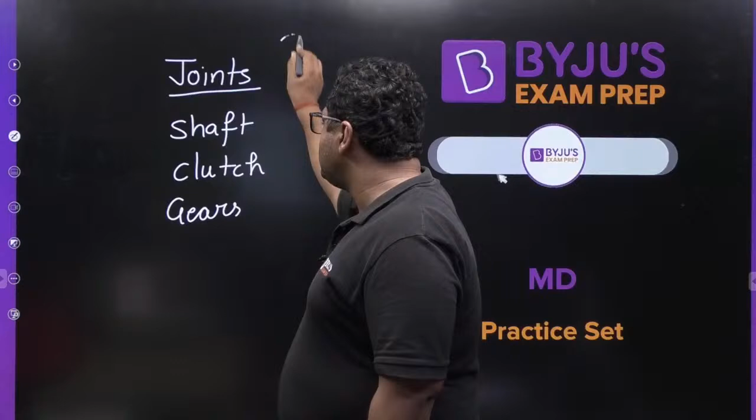Today we will see the rest topic of machine design so that we can cover all the topics. Yesterday we saw fatigue loading, questions related to brakes and bearings, and today we are going to cover joints. There are three types of joints: bolted, riveted and welded. Then we are going to cover shafts, clutches, and after clutches, gears as well. So these are the topics from which questions are there in today's session.

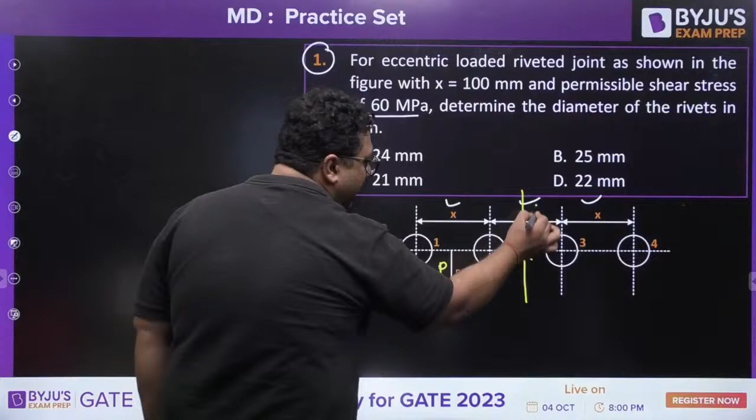This is a 50 kilonewton load. First of all, you will see the equivalent effect of this load at CG or centroid. To see the equivalent effect at the CG or centroid of the rivets, you will apply the same load in the downward and upward direction. So if this is load P, you will apply P downward, P upward. Then this P and this P will make a couple.

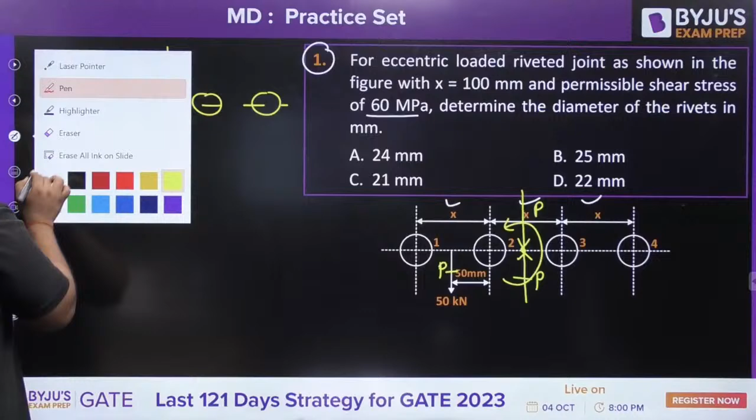So they will be making a couple, and you can see the couple is coming like this. Now I can make this diagram freshly, that we are having 4 rivets like this. This is the line of them, and this is going to be the centroid. At the centroid we have one force of 50 kilonewton, and we have one couple, and for this couple, what is the distance between these two? Obviously 100. So you will write it is nothing but 50 kilonewton into 100 mm.

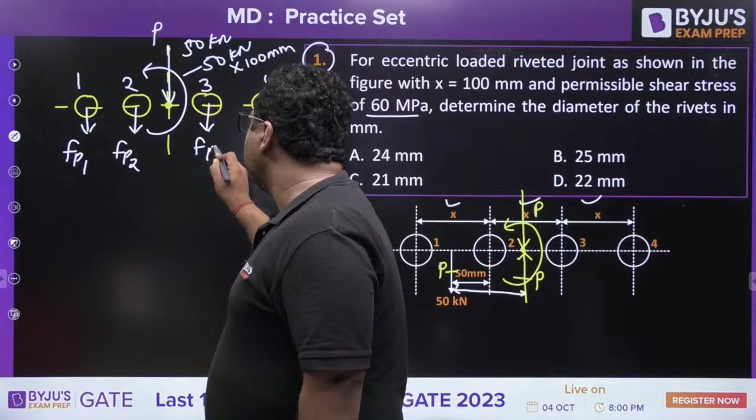Okay guys, so now you need to see the primary effect of force and secondary effect of couple. Because of this force, this is said to be the force which is acting, P. For all the rivets, this force will be equally distributed, and that is said to be the primary effect. So this is rivet number 1, rivet number 2, rivet number 3 and rivet number 4. We will call it primary force 1, primary force 2, primary force 3 and primary force 4.

Okay, my dear, yes Midun, good evening. Late ho gaye, solve this question dear.

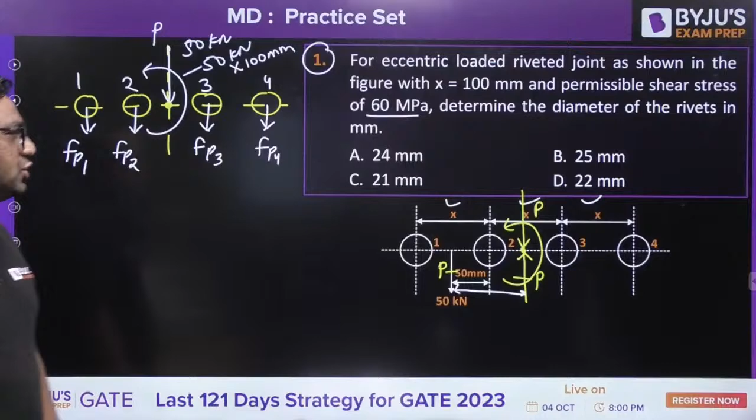And guys, do like and share the session so that other students can also reach here. I know machine design is one of the low weightage subjects, but guys, 4 to 6 marks are very much, I can say, very effective. They can affect too much if you are leaving it improperly. So try to do at least the type which every year comes.

Yes, so guys, what you will be doing? You will be saying this is going to be P by 4.

Okay, so 50 kilonewton will be divided into that. Now you will see the effect of this couple. For this couple, you know that if you see all these 4 rivets, the first one is going to be farthest, so secondary effect will be coming in this direction on rivet 1, in this direction on rivet 2, in this direction on rivet 3, in this direction on rivet 4.

You also know that secondary force Fs1 will be written as P into e into R1 divided by R1 square plus R2 square plus R3 square plus R4 square. So as you know, the first rivet is the critical loaded rivet. Why? Because it is going to be at R1 distance, and it is nearest to the load. The rivet which is nearest to the load is the critically loaded rivet.

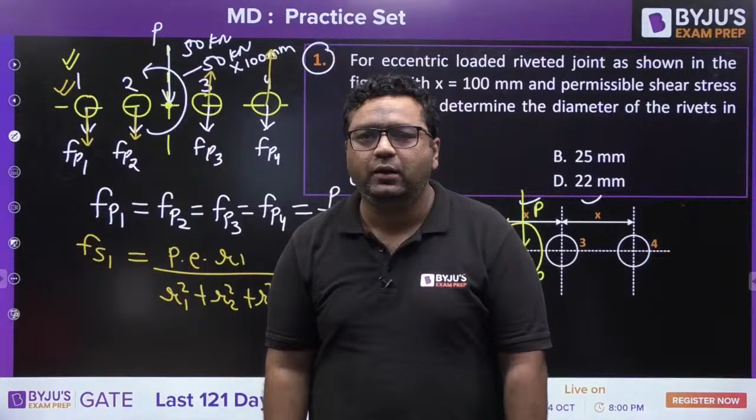So solve this question, guys. This is P into e into R1, divided by R1 square, R2 square, R3 square, R4 square. Put these values and get the secondary forces.

Now you can see both primary and secondary are acting in the same direction, so resultant will be nothing but primary plus secondary. Resultant force divided by pi by 4 d square, this is going to be the tau maximum stress. In the question, you need to find the diameter of the rivet when the stress is mentioned as 60 MPa. Try to solve it.

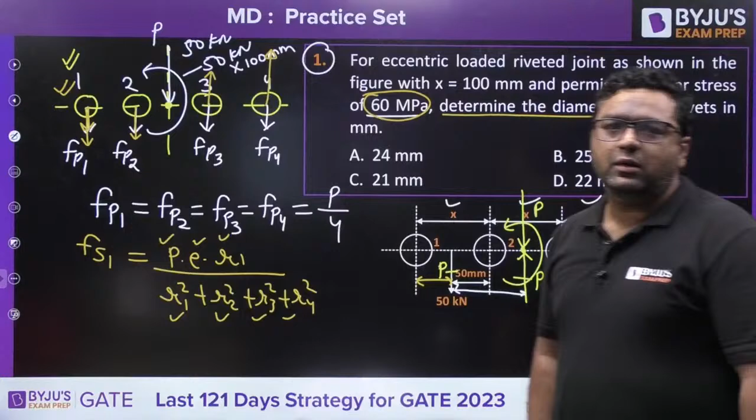What is the answer coming out to be? What would be the answer for this question, guys? Please tell me.

Tell me, I have solved it in front of you. Just calculations are left.

Yes guys, solve it, solve it.

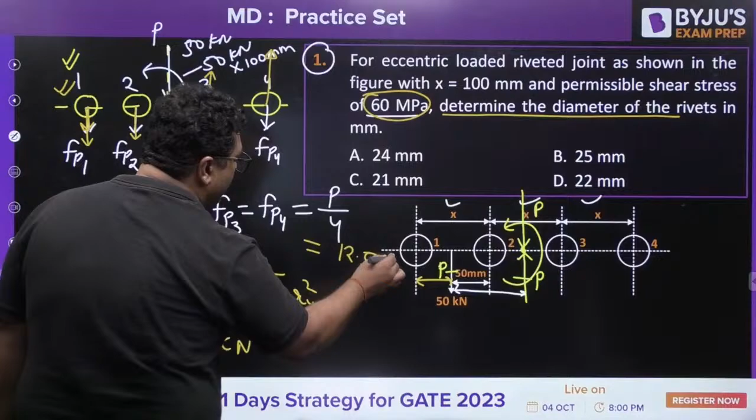So when you will be solving it, guys, the secondary force will be coming out to be equal to 15 kilonewton, and primary force is P by 4, it is going to be 50 by 4, which is 12.5 kilonewton. So when you will be putting this value, tau permissible is already given to you. Putting this value, resultant is known to you. You will be getting the diameter of rivet to be coming equal to what?

Tell me, what will be the answer?

Yes, you just need to do this one. Resultant will be, you can see FP1 is 12.5 plus 15, that is 27.5. So 27.5 into 10 to the power 3 divided by tau max which is 60 MPa, is equal to pi by 4 d square. Tell me the value of d.

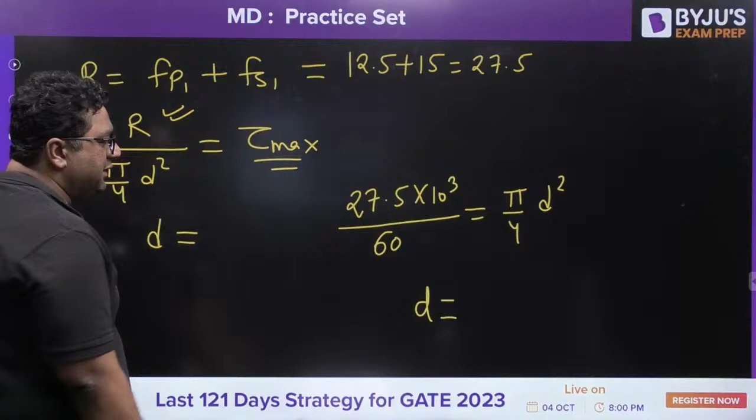Just you need to find out the value of diameter. All the things we have already put it, we have already kept. What would be the answer? Please tell me that.

Nagaraju is saying 27.72. Sorry dear, I feel you have done some mistake in calculation because that is not in the option.

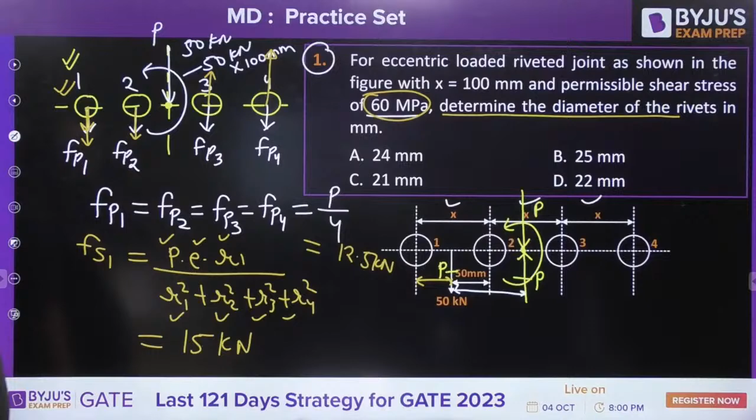Yes, anybody else? 21, 22, 24 or 25?

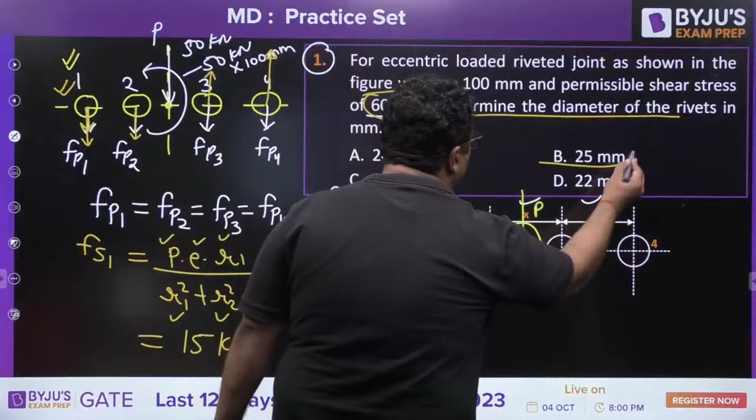I have given you the value of primary and secondary forces. The first rivet is the worst rivet. Mithun has given the right answer, 24.15. So the answer will be B, 25 mm. Very good guys, so this is the first question.

Now we are coming to the second question. This is a relatively easy question. Very good, Naveen, very well done.

Now moving to this question, guys. In a riveted joint, the diameter of rivet hole is 20 mm. Pitch is 3.5 times the diameter. They are asking you the efficiency. You know efficiency is given as, what is the formula for efficiency? It is P minus D by P, this is the formula for efficiency.

So guys, just apply the formula and get the answer. This type of question has already been asked in GATE 2004, that's why I have taken this. So this type of question has appeared 2 times in the exam. Solve it and give me the answer.

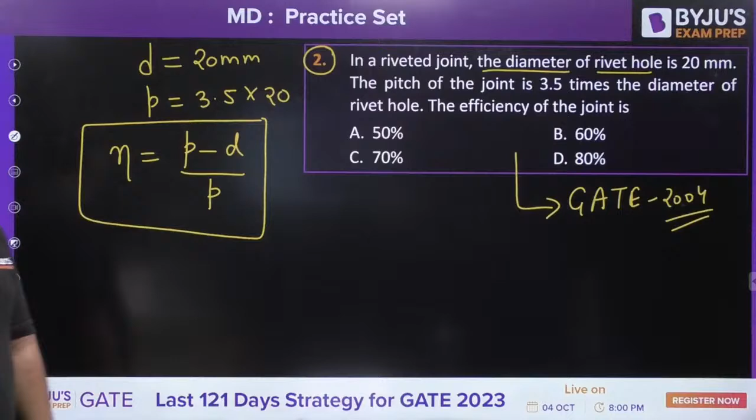Mithun is saying C, very good. Tomato, Pudina, where are you, tell me. Nagaraju, Naveen, the formula is in front of you, I have given you the formula. You just need to put the value, nothing else. Very good, Nagaraju, Mithun, very well done, excellent.

So guys, when you will be putting the value, the pitch is 3.5 into 20, minus 20, divided by 3.5 into 20.

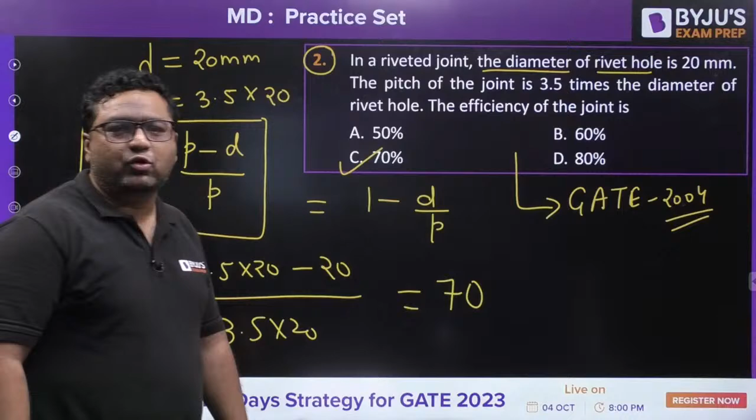You can also solve it as 1 minus D by P, and you will get the answer to be 70%. C is going to be the right answer. Yes, Krishna Murthy, very good, your answer is correct.

Let us move to the third one. This is also on the same formula. This time they are asking the pitch, and they have given you the efficiency, which is 1 minus D by P. Solve it and find out the pitch, guys. This is question number 3, do this and we will move on to the next question.

So guys, we are covering joints, gears, shafts and clutches. These 4 topics are covered today. With this, the machine design part will be over, and then I will take material science on Saturday for the same GATE Champion series.

Pudina is saying 100, very good. Naveen is saying 100, Tomato is saying 100, Nagaraju is saying 100, very nicely done. Mithun has also already answered. Yes, the answer is going to be 100 mm, guys, no doubt about that. Very good, Krishna Murthy.

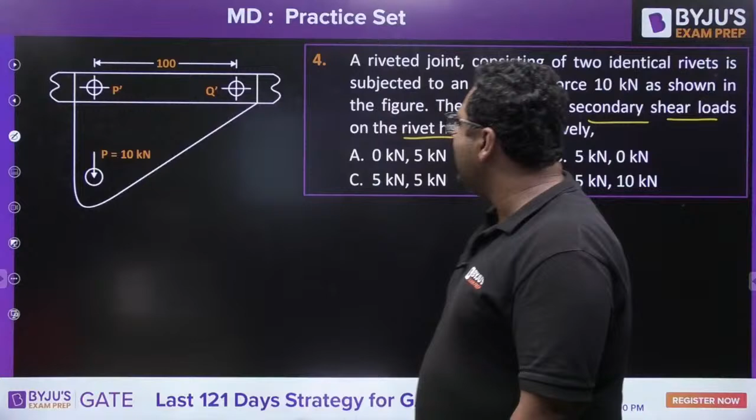Moving to the next question, guys. This is from eccentric loading, and this time they are asking about the primary and secondary shear forces on the rivet hole, with the force acting like this. Two identical rivets are subjected to an eccentric force of 10 kilonewton; find the primary and secondary shear loads on the rivet hole respectively.

So guys, just solve it and give the answer. Solve it and give the answer.

First of all, you will see the centroid. After looking at the centroid, you apply one force downward, one force upward. These two will make a couple. On both the rivets individually, the primary force will come in the same direction - this is primary 1, this is primary 2. When we talk about secondary, as the couple is acting like this, secondary here will come in the downward direction, FS1, and here in the upward direction, FS2.

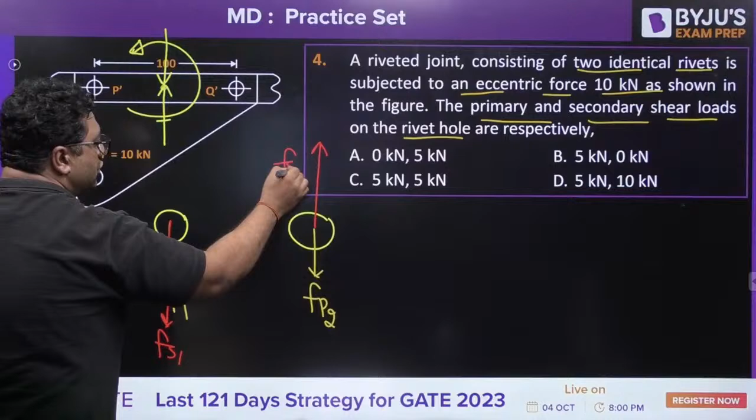You just need to calculate the values because this is at the R distance, and this is also at the R distance. So FS1 equals FS2, and the formula is P into E into R divided by R1 square plus R2 square. Primary forces are easy to calculate - FP1, FP2 are nothing but the net force P divided by 2. This is how you find secondary and primary forces, my dear.

Mithun has answered it as D. What about others? I am waiting for others' answers. Mithun, you can check it again if you want. Yes Krishnamurthy, what is your answer? Naveen, what is your answer? Nagaraju, Pudina, Tomato, what are your answers?

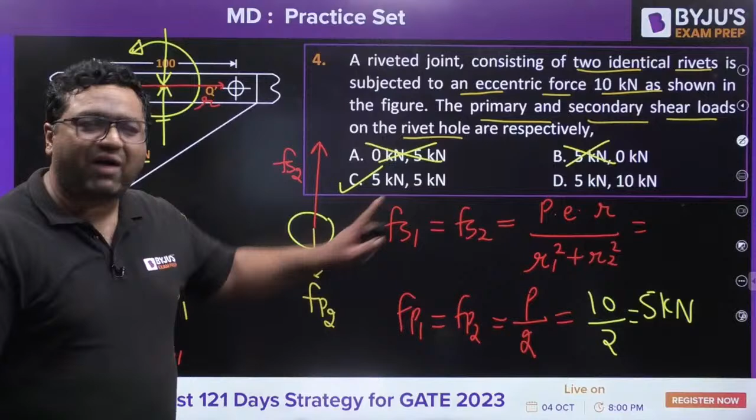If you see, total load is 10 kilonewton, so this 10 will be divided, giving 10 by 2. So no doubt, 5 kilonewton will be the primary one. If 5 kilonewton is primary, A cannot be the right answer - either B, C or D will be right. You can see secondary does not come out to be 0, so B is also wrong. Now we need to see if secondary is 5 or 10, so calculate it. Total distance is 100, so this distance will be 50. So P is 10 into 50, the distance is again 50, divided by 50 square plus 50 square. It comes out to be 5 kilonewton. So the answer is C for this.

Very good, so guys let us move further. Now question number 5 and 6 are on this figure. You can see this is once again eccentric loading.

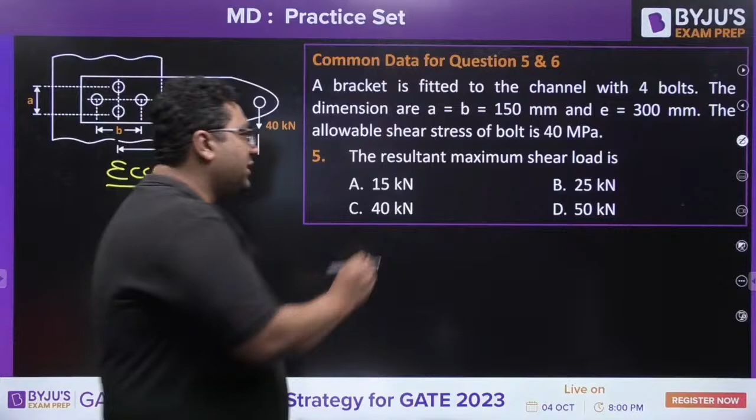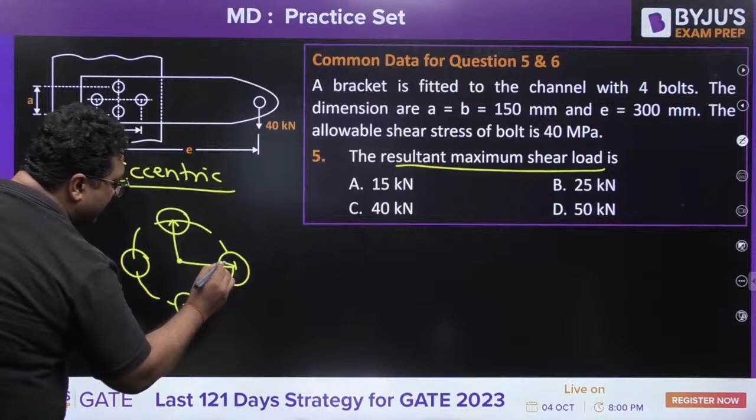Once again eccentric loading. This time you need to find out the resultant maximum shear load. If you see all the rivets, they are present on the periphery of a circle. So if this is the CG or centroid, you can see all the rivets are at the same distance. So secondary force will be coming equal for all.

You need to find out the resultant maximum shear load and see the critically loaded rivet. All rivets are near the centroid, so if you see load wise, they will be same, but you need to see where primary and secondary are directly added. So first we will see the effect on the centroid, and then we will move further.

Try to solve it, guys. This time I will wait for you to answer, because we have done this type of question a lot. Still, if you want, I can give you a favor. These are 4 rivets, with CG or centroid, and you will put one force down, one force up.

So down force and up force, this is 40, this is also 40. Now this 40, this 40, this 40 and this 40 will make a couple. So overall, what you will be getting, I am showing you: at the centroid, a 40 kilonewton load and a couple like this.

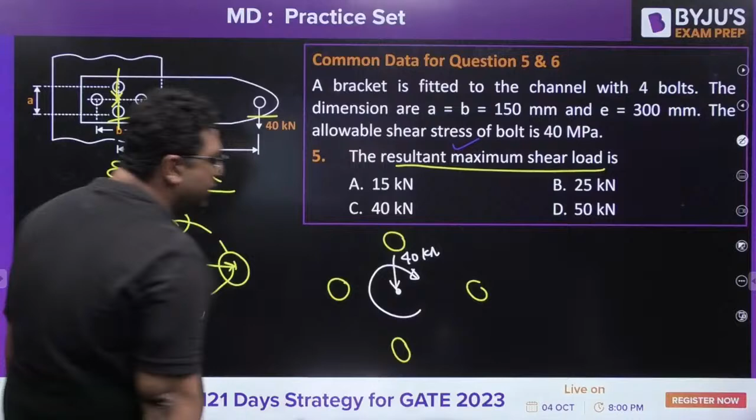And this couple is nothing but P into E. So we have one force and one couple P into E. Now you will see the primary and secondary effect. For this 40 kilonewton, on all the rivets we will be having a primary effect like this, like this, like this, like this. And on all the rivets, when you see secondary effect, it will be like this, like this, like this, and like this.

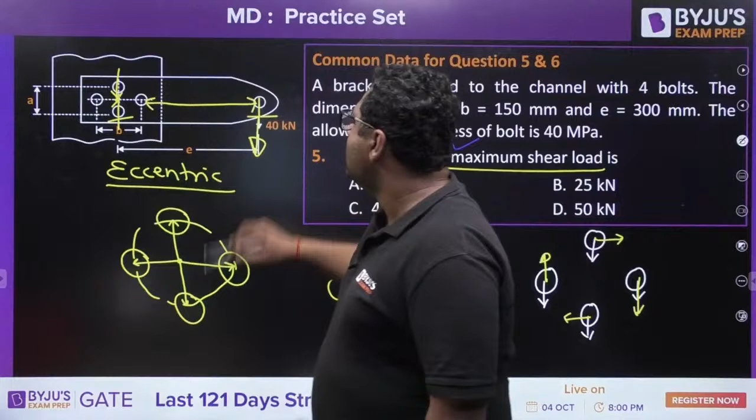You can see from this applied load, this rivet is the closest one, so this is going to be the critically loaded rivet. This rivet is going to be very important for us.

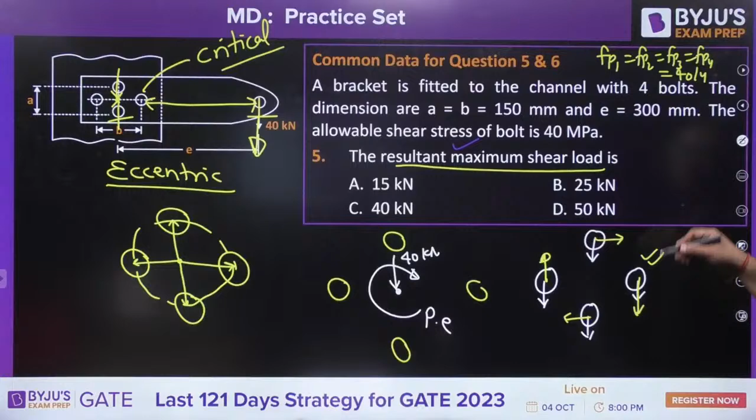So primary force in all the rivets are going to be equal: FP1, FP2, FP3 and FP4. It will be coming out to be once again 40 by 4. So primary force is 10 kilonewton. I will write primary by white color, 10 kilonewton.

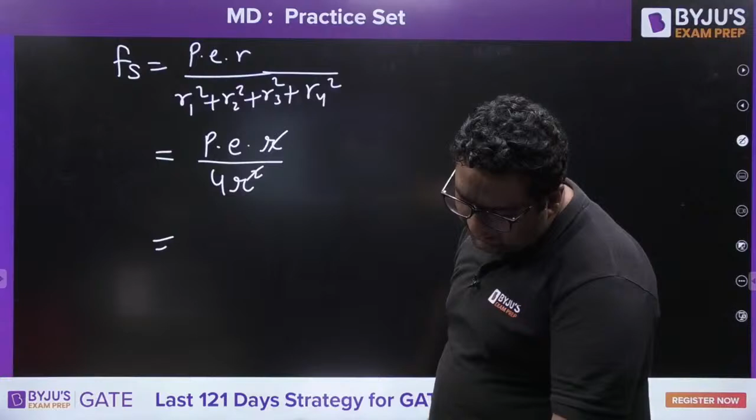For secondary you need to apply the formula that secondary force equals P into E into R divided by R1 square plus R2 square plus R3 square plus R4 square. All the R's are equal, so you can write it as P into E into R by 4R square. R and R will get cancelled out. You will put the value and get the secondary force, which comes out to be 40 kilonewton.

Then you will find out the resultant. If you see the formula, both are acting in the same direction, so you can directly add and get the answer. FP plus FS: 10 plus 40, answer will be 50 kilonewton.

So those who have given D, that is the correct answer. Very good, very good, very good.

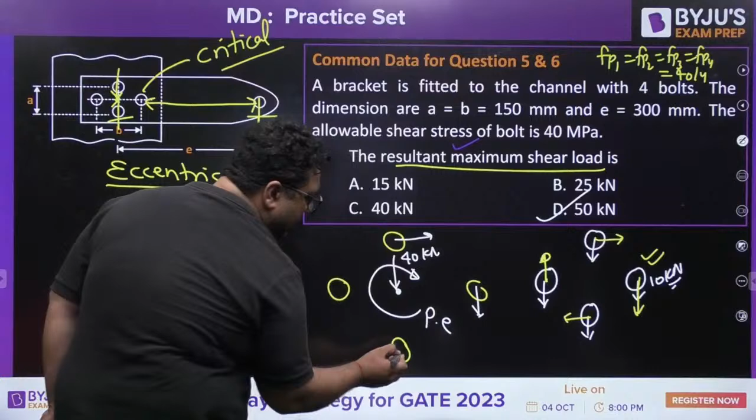I have explained the direction of secondary forces. If you see, this is the couple going, so this couple will apply here like this, here like this, here like this, here like this. If you want to see the direction, just do one thing, I am telling you, on the next slide.

If the couple is acting like this, you just make the radius in the direction of the couple, perpendicular. Radius in the direction of couple, perpendicular, for each rivet. This is how we can check the direction of the secondary force. Is it clear, guys? So the answer will be coming out to be D for this.

And with the same data, you need to find out the nominal diameter of the bolt. So here the same data is there, you just need to use R by pi by 4 D square equals tau permissible, which is given to you as 40 MPa. Put the value and get the value of diameter. With this, the sixth question will be over.

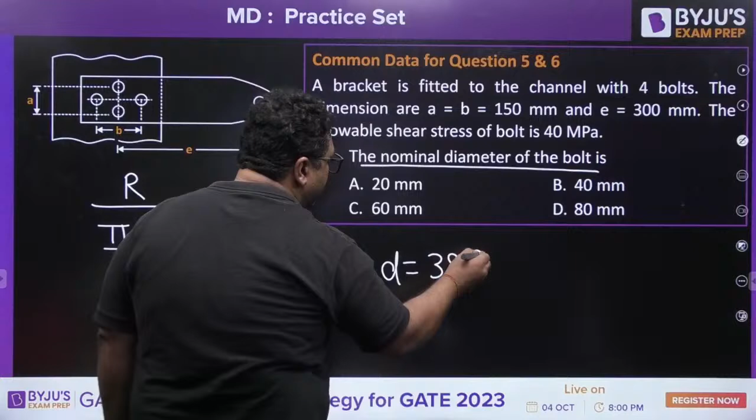Pudina, Tomato, and Midun have given the answer as 40 mm. Let me check it... yes. Guys, the answer comes out to be 39.9 mm, which is near to 40 mm. So this will be the final answer.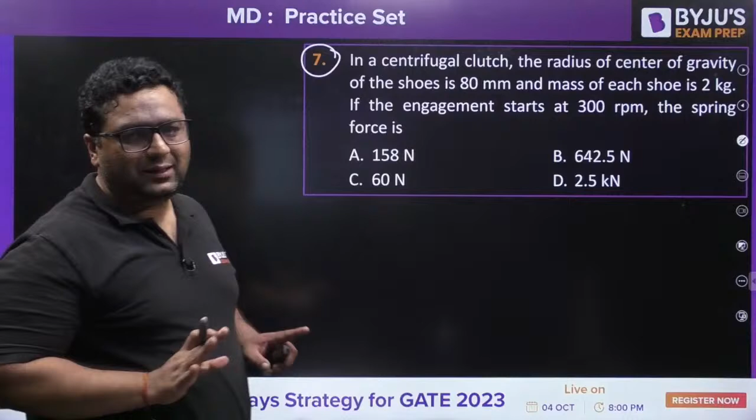Moving to question number 7. Now the question is from clutches. We have already done the joint questions, and now we move on to the clutch questions.

Yes, solve it guys. R is the resultant force. In the previous question, we have found out R to be 50 kilonewton.

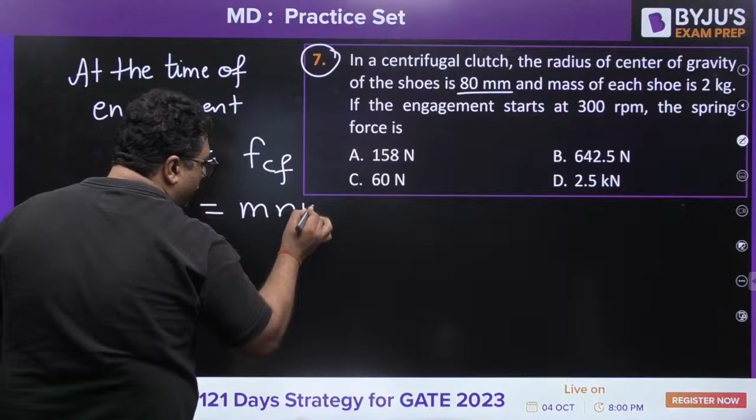The spring force Kx becomes equal to the centrifugal force, which is nothing but m r omega1 squared. So my dear, you just need to equate these two things and you will get the answer.

Kx is equal to m r omega squared. So my dear, just find out the answer.

This is a centrifugal clutch. Midun is saying A will be the answer. What about others? Mani, solve it. Nagaraju, solve it. Tomato, Pudina, tell me what will be the answer.

Krishna Murthy, where are you? Solve it and get the answer. Then we will move to the next question. Okay, yes, solve it guys.

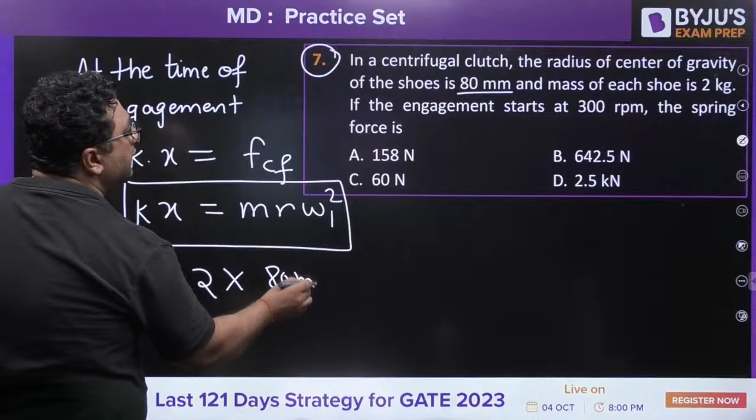Mass is given to you as 2 kg, R is given to you as 80 mm, and Omega is 2 pi n by 60, squared. Solve it and get the answer.

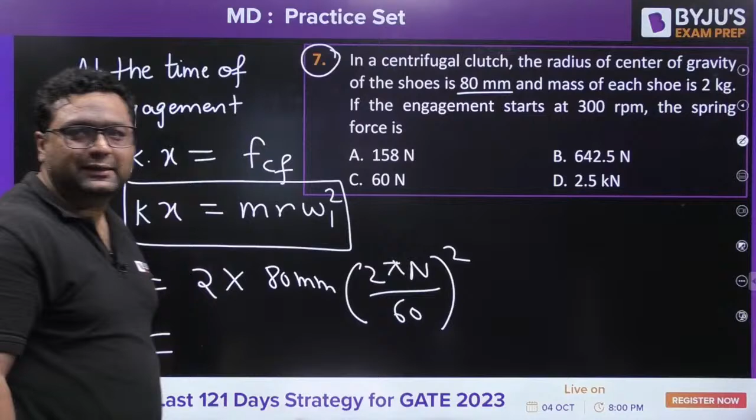Okay, Mani is also saying A, and yes guys, the answer is A. The answer will be coming out to be...

158 Newton. 158 Newton is the right answer. Okay, very good, Mani.

Moving to the next question. This is from a multi-plate clutch. So they are saying that a multi-plate clutch transmits 50 kilowatt of power, and at 1400 RPM, they have also mentioned the RPM.

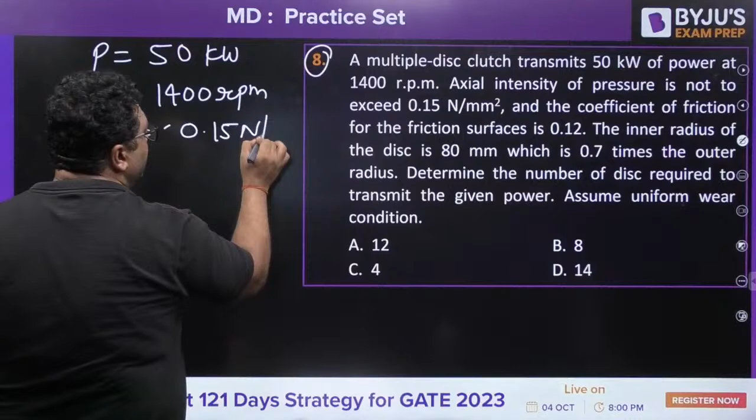And they are also giving you the pressure, 0.15 Newton per mm square. Coefficient of friction is 0.12. Inner radius of the disc is 80 mm.

And the outer radius — the inner radius of the disc is 80 mm, which is 0.7 times the outer radius. So this is 0.7 times outer, meaning 80 by 0.7, and you will get the outer radius.

So they are asking you the number of discs required. For that, you need to assume uniform wear condition.

Very good, Krishna Murthy, it's great.

So guys, first of all for this question, you need to find out the torque. Power is T into omega, so you will be getting torque from this.

Once you get torque from this, you can write N, the number of discs, using the uniform wear theory: 1 by 2 mu W into R naught minus Ri. Is it clear? R naught plus Ri.

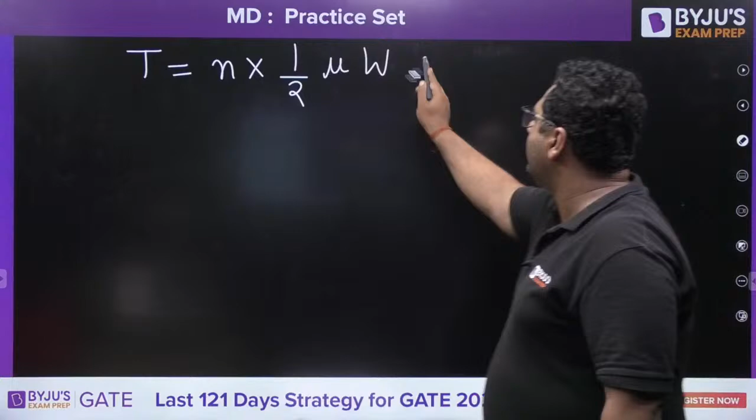So when you see this, you will be applying the uniform wear theory. After that, you know what you need to do — you will be putting the value of pressure. I am writing it in terms of pressure directly, and that will help you, so first find out the torque.

Torque is power by omega, so first find out this torque. Then you know the torque of uniform wear theory — how it is given. Yes, what is the torque of uniform wear theory? Do you remember — 1 by 2 or 2 by 3?

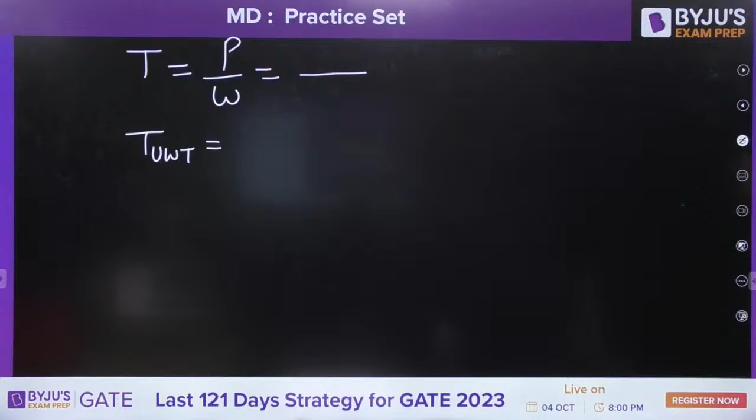Yes, 1 by 2 or 2 by 3. Okay, T is 341.04 — let me check. Yes, it is correct. 341.04 Newton meter is correct.

Mani is saying 1 by 2. Okay, it will be 1 by 2 mu W. What comes after that? 2 by 3 is UPT — 2 by 3 is UPT.

2 by 3 mu W, R naught cube minus Ri cube, divided by R naught square minus Ri square — this is the result for UPT.

Okay, here it is UWT, so you will be having 1 by 2 mu W R mean, yes, and N is the number of discs. So my dear, you just equate it with...

341.04. And my dear, the load according to UWT can be written as pressure into 2 pi R into R naught minus Ri.

And my dear, if it is mentioned that pressure is maximum, the radius will be minimum, so it becomes P into 2 pi Ri into R naught minus Ri. Okay, so this is what you are going to do.

Okay, and then you will be putting in the values and you will get the answer. Solve it.

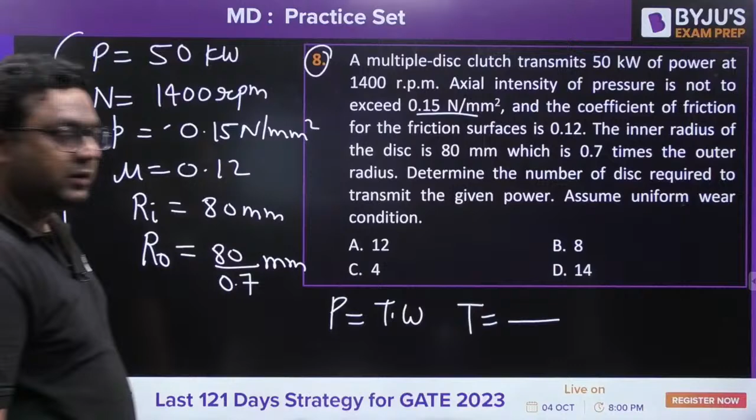11.3176. Very good, very good. Tomato, Pudina, your answer is correct.

11.31 you are getting, but the option you have chosen is wrong. Krishna Murthy has also answered. So you will be getting N to be 11.346, so the answer will be 12.

Yes, Tomato Singh, Pudina, Midun, Krishna, very wonderful. The answer is going to be A for this.

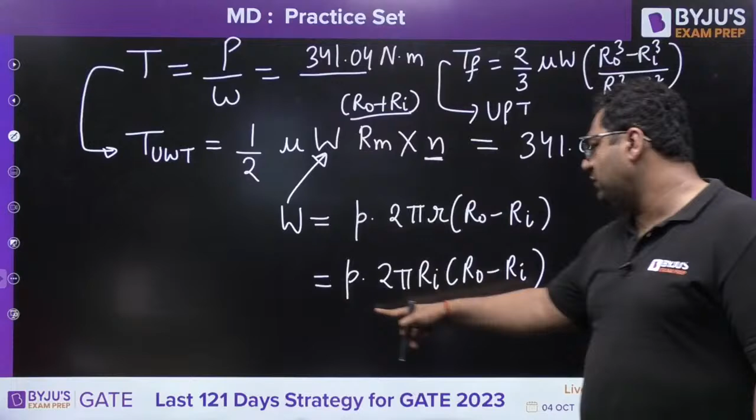Yes, Nagaraju and Mani, understood what you need to do. This is R naught plus Ri, you just need to find out N. The value of W is in front of you. Only calculations and calculation. In machine design, without calculation you cannot think. Calculations are very, very important for this subject.

Yes guys, let us move further now. The answer will be coming out to be 11.346, so 12 you will tick. Wonderful, moving further.

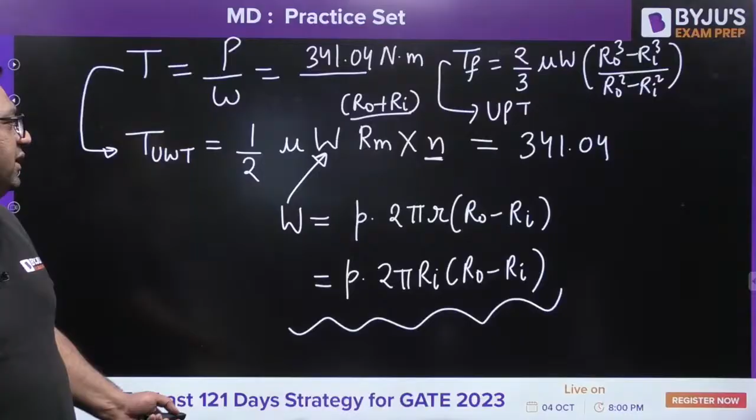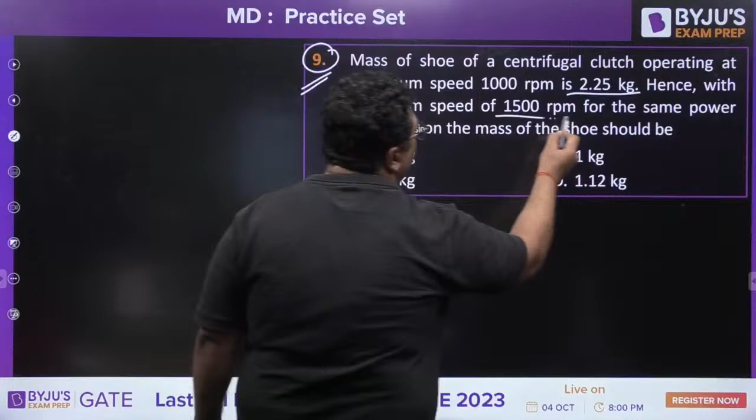Now question number 9, once again from centrifugal clutch. This time, mass of shoe of a centrifugal clutch operating at maximum speed is 2.25 kg. Hence, with the maximum speed of 1500 rpm, for the same power transmission, the mass of shoe should be.

So guys, try to solve this one. This is a very easy question. You already know when we are talking about power, they are asking about the transmission power only. So power is going to be directly proportional to...

mr square. Okay, and they are also saying the speed is changing, so I must write mn square because r is not changing. I can write mn square because generally force is mr omega square, so r is not changing, so mn square. So p1 by p2 equals mn1 square by mn2 square, m1, m2. m1 is given to us, n1 is given to us, n2 is given to us, m2 we need to calculate. Solve it.

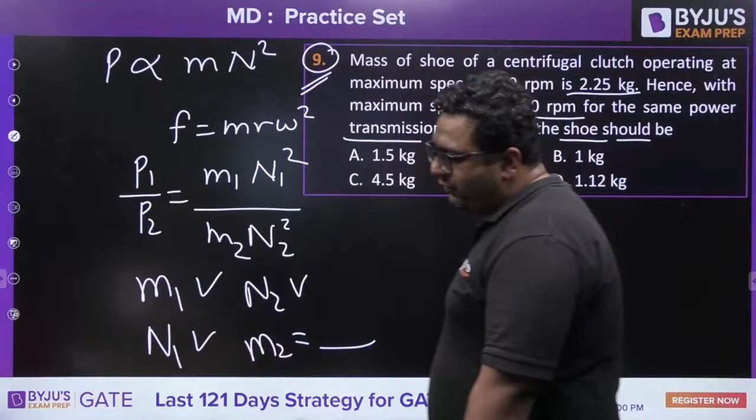No, Krishna Murthy, data book will not be given in the GATE exam, but in ESE conventional paper it is provided.

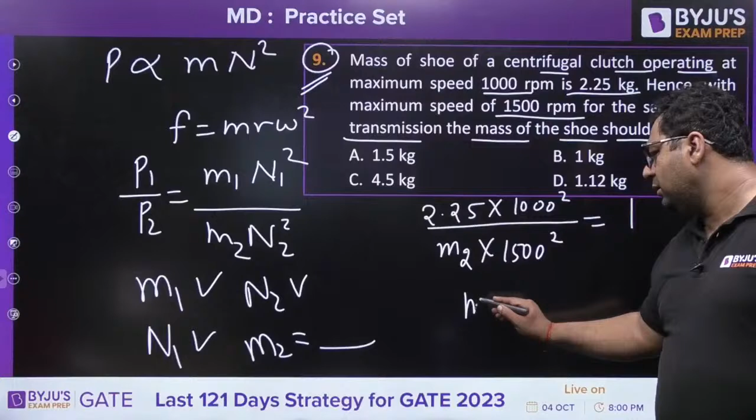Yes, it is already mentioned that mass of a shoe of centrifugal clutch operating at this speed is 2.25. So 2.25 into 1000 squared divided by, hence with the maximum speed of 1500 rpm, same power. So this is going to be m2 into 1500 squared equals 1 because power is same. M2 will be coming out to be 1.5 kg. The answer is A for this.

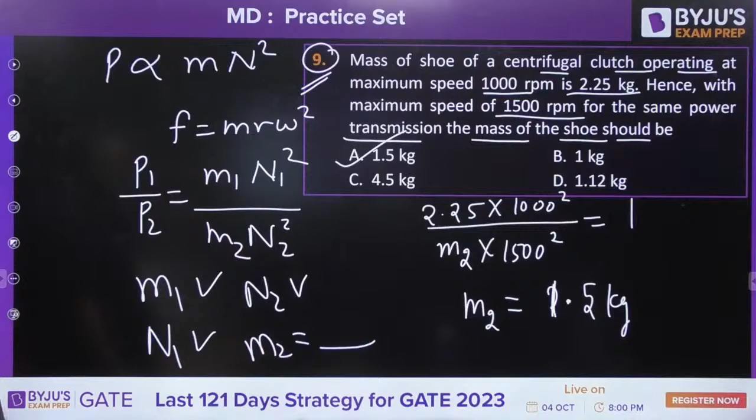Now the question is from gears. Lewis form factor, very good, Krishnamurthy.

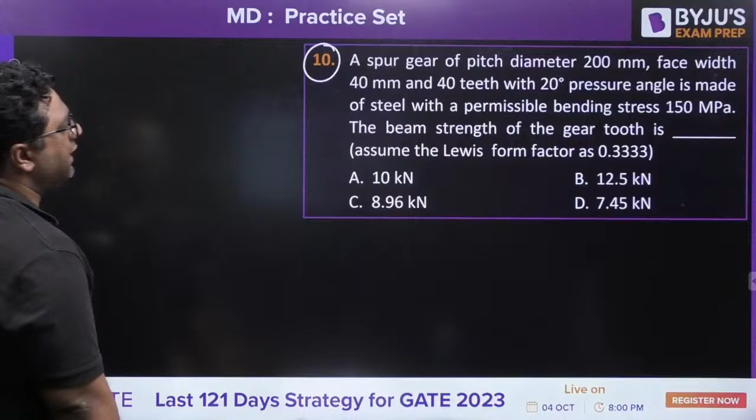So now the question is from gears. Try to solve it, this is a simple formula-based question guys. They are saying a spur gear of pitch diameter 200 mm, diameter is 200 mm, face width 40 mm, teeth are 40, pressure angle 20 degree, and they are saying the bending stress sigma B permissible is 150 MPa.

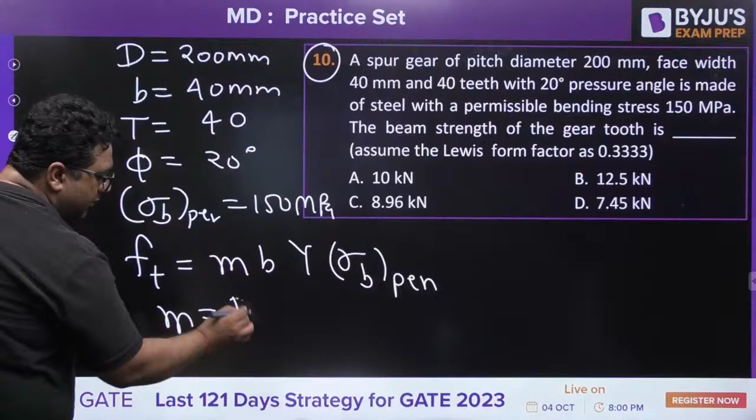Beam strength formula is M B Y sigma B permissible. You know module is D by T, and this is Y, Lewis form factor. Put the value, get the answer, guys.

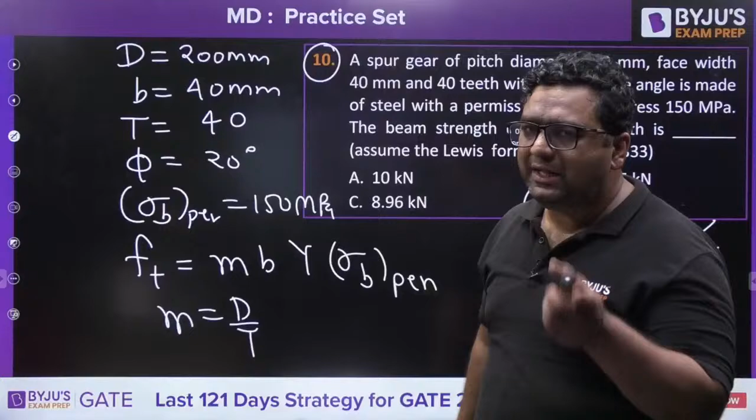Yes Nagaraju, gears are there in 3 subjects. In theory of machines, you study gear profile, gear train. In machine design, we study design of gears. And in production, you study manufacturing of gears.

Okay, no issues. Mani, I have given you the formula, just put the value, get the answer. The formula is in front of you. Solve it, guys.

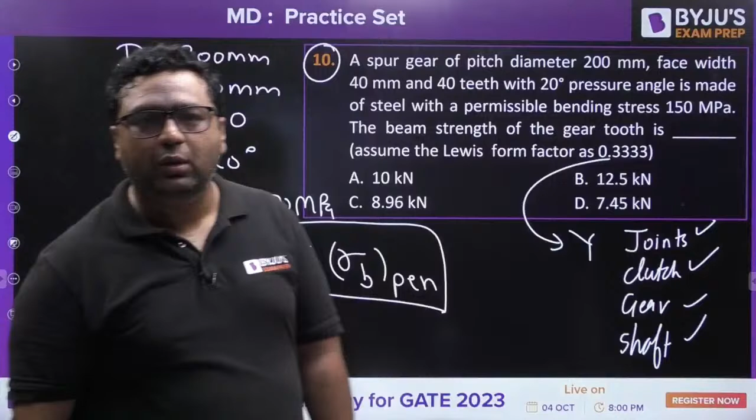Very good. Midun is saying 9.9. It is correct. The answer will be 9999 Newton. So you will be taking which one? A will be the right answer, 10 kilonewtons.

Very good. Wonderful, Dilip Kumar. Moving to question number 11 now.

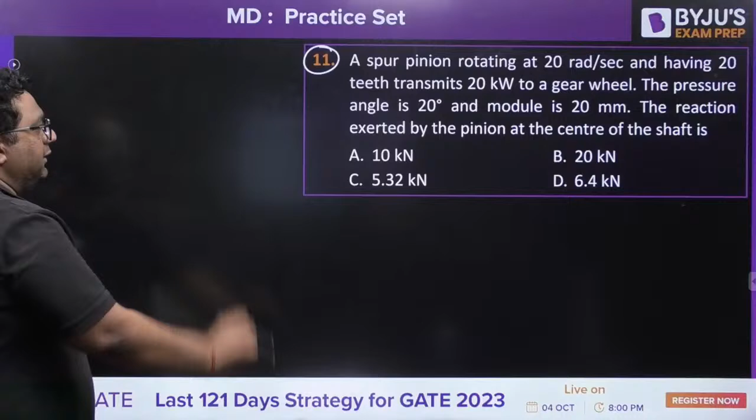So my dear, in this spur pinion rotating at omega of pinion is given to you as 20 radians per second, having 20 teeth, number of teeth on pinion is 20. Power is 20 kilowatts, pressure angle is 20 degree, module is 20 mm.

Yes, the reaction exerted by the pinion at the center of the shaft, you need to tell about the net force.

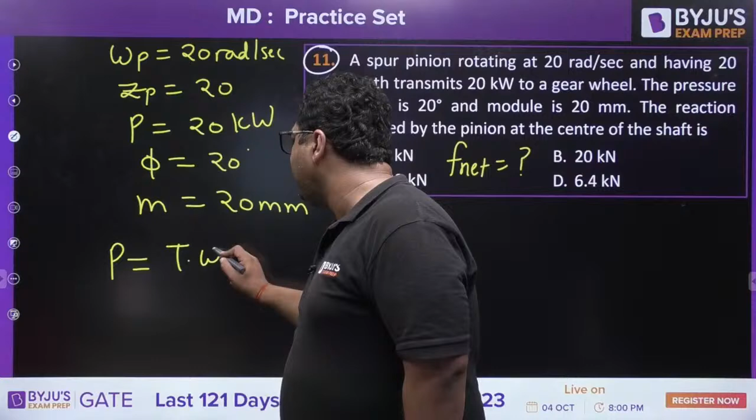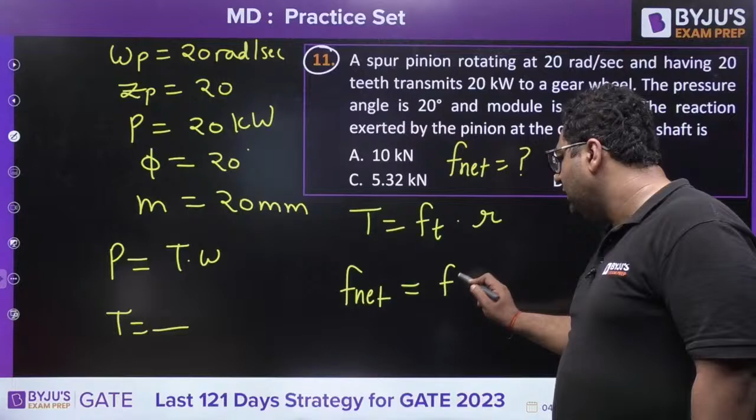Okay, so my dear, if you see from the power, you can find out the torque. Power is torque into omega, you will get torque from here. Torque can be written as Ft into R. And net force can be written as Ft by cos phi. Is it clear?

Yes, so try this, solve it. The formulas are there in front of you. First find out the torque, find out the tangential force. And you know that module is diameter by number of teeth. It can be written as 2 times radius by number of teeth, so radius is nothing but mz by 2.

Yes, so I have given all the things in the simplified manner in front of you guys. You just need to apply the formula, get the answer. Nothing else is required.

Midun is saying C, very good. What about others?

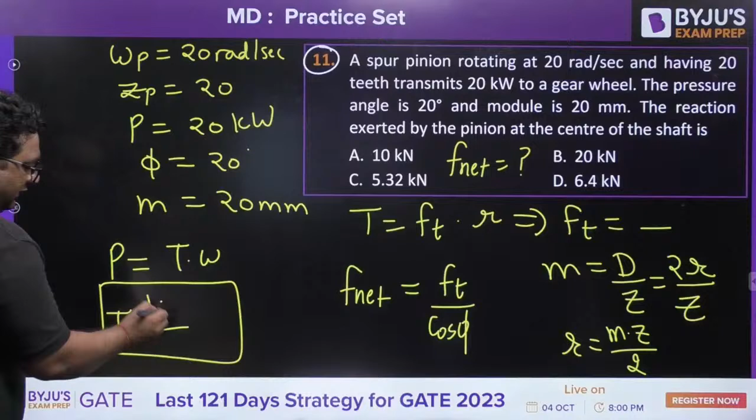Okay, what you are getting the value of torque? Are you getting here 1000 Newton meter? Torque is coming 1000 Newton meter. Then Ft will be coming out to be what? 5000 Newton. And then you will be calculating F net, that will be coming out to be 5320 Newton. So answer will be C for it.

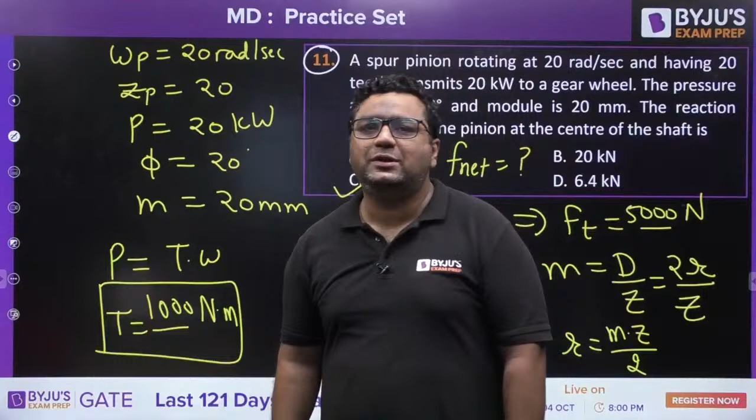Wonderful guys, so Krishna Murthy, Midun, wonderful, your answers are very much correct. So answer is C guys. We are left with 3 more questions now.

A spur gear system having 20 degree full depth, pressure angle is 20 degree, involute profile transmitting the power 50 kilowatt at 30 revolution per second. Normal pressure between the teeth is 35 Newton per mm of face width.

Okay, they are saying the base circle radius of gear RB is equals to 188 mm. You know very well that RB is nothing but RP cos phi. So from here you can find out the pitch circle radius. Once you get pitch circle radius, you know that module is diameter by number of teeth. So what is the radial load on the bearing you need to find out?

Vineet, yes Vineet, only spur gears are there. Yes, you are correct. Yes guys, solve this.

I will tell you first of all RP value you will be getting 201.13. With this you can find out the diameter, 2 times of radius. Okay, solve this one first, then we are moving further.

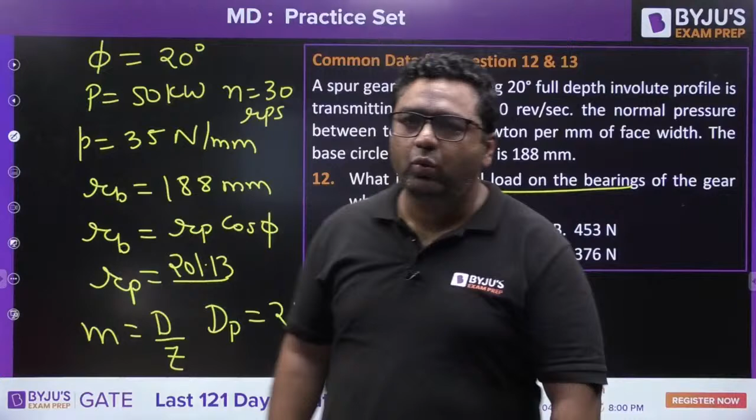Find out the torque now. Power is T into omega. Find out the torque. After getting torque, torque is Ft into R, you will get the value of Ft. Solve till this point first.

Yes, after getting Ft, Fr is Ft tangent phi, and you need to answer is the radial load only. So Fr is Ft tangent phi. Find out the radial load.

Krishna is saying 402.26. What is that dear? 402.26, let me check it. Yes, diameter is 402.26.

Now find out the value of torque. Find out the value of torque, then we will move further. After torque, you will get Ft.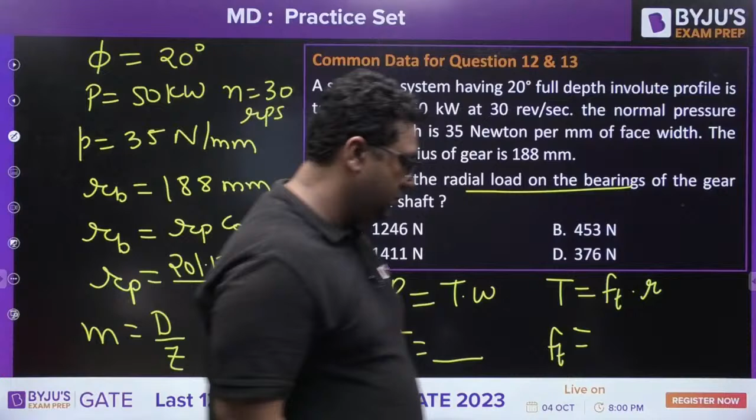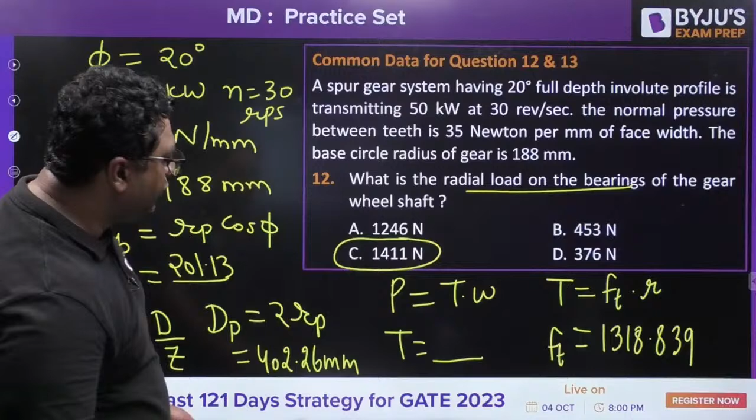Yes, okay, Midun is saying C is the answer, C is 1411. Yes dear, your answer is correct. So first of all, I am telling you Ft will be coming out to be 1318.839. Okay, Pudina, so 1318.839 is the Ft value. Then Fr you will be calculating, and when you will calculate Fr, it will be coming out to be 1411 Newton.

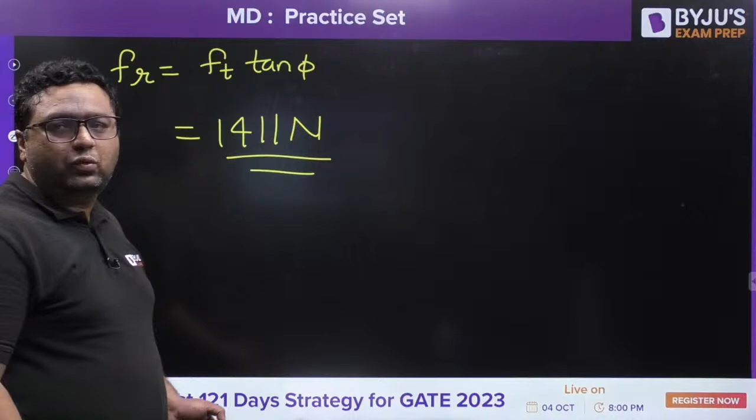Okay, so guys, now we are moving to, okay very good, torque is coming out to be 262.

262.25. Very good, Nagaraju. So you are just having one small issue, Nagaraju, that calculations.

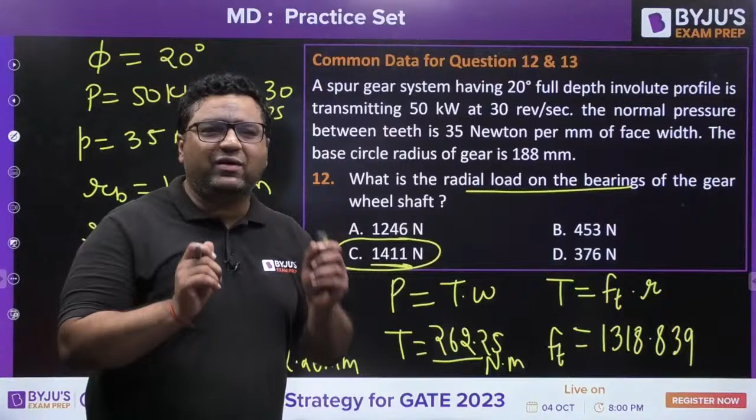Vineet, if you want to increase that, attempt more and more number of tests for that subject. The more questions you practice, your brain will work more in that direction, and you will be able to solve things quickly. Only one thing can save you, that is practice.

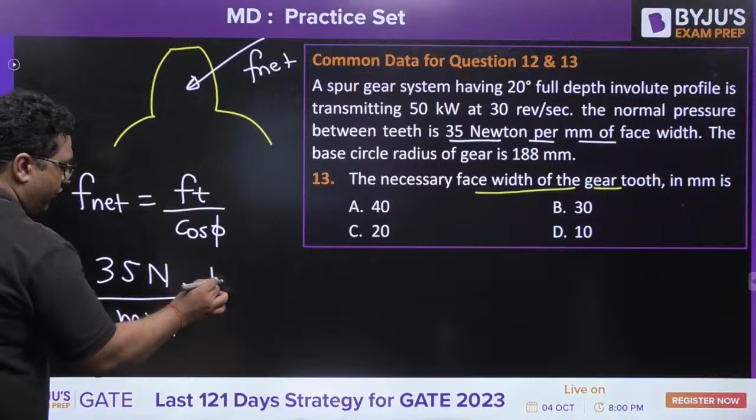Okay, fine guys, now let us move to the next question: necessary face width of the gear tooth. When we talk about the gear, the force is coming normal to the gear profile, that is the net force. So first you need to find the net force: Ft by cos phi. Once you get the net force, you already mentioned 35 Newton per mm of face width, so 35 Newton per mm of face width into face width in mm will be F net.

So you need to find the face width from this formula. Solve it, guys, the second last question. It is after that one question from the shaft only. Solve it, guys, solve it. This will give you the face width in mm.

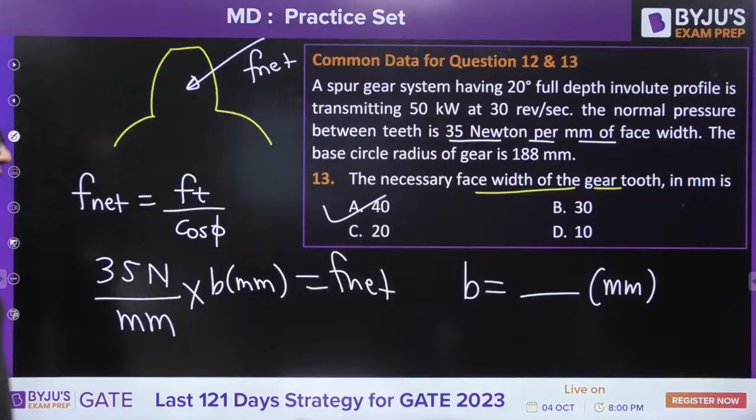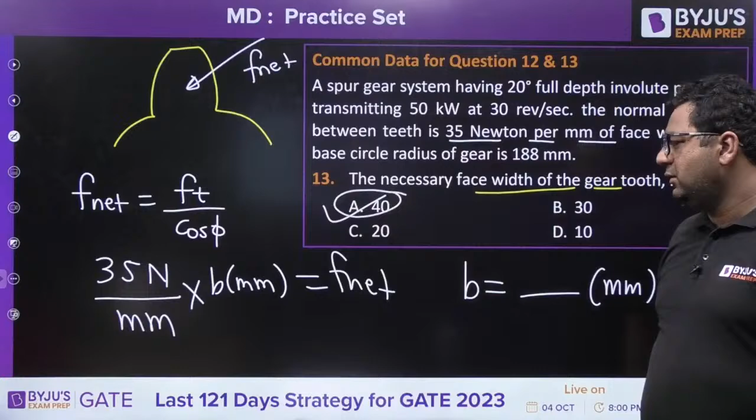So Dilip Kumar is saying 37.24. Okay, so 37.24 you are getting. Very good, Midun, very good. So guys, the answer will come out to be A for this, because A is the option which is more than 37.24. Yes, it is correct, 37.8 is also fine. So the answer will be A for this. Very good, Krishna Murthy, very good.

Guys, now the last question will be coming in front of you. A solid and hollow shaft are transmitting the same power, PS equals PH, at a constant speed and subjected to the same maximum shear stress. Inside diameter DI is 2/3 of outside diameter. Find out the ratio of the weights: weight of solid to weight of hollow.

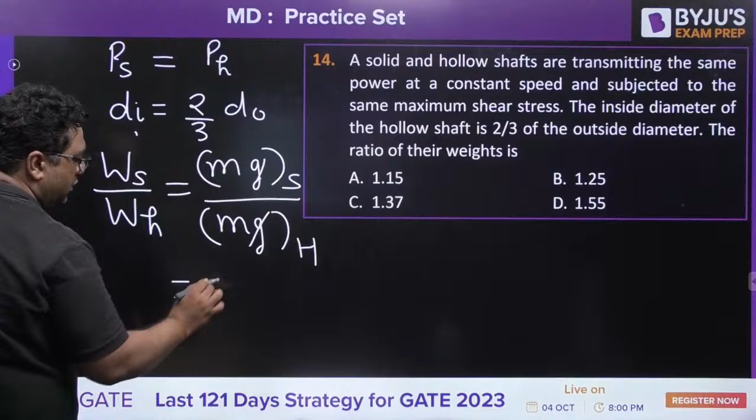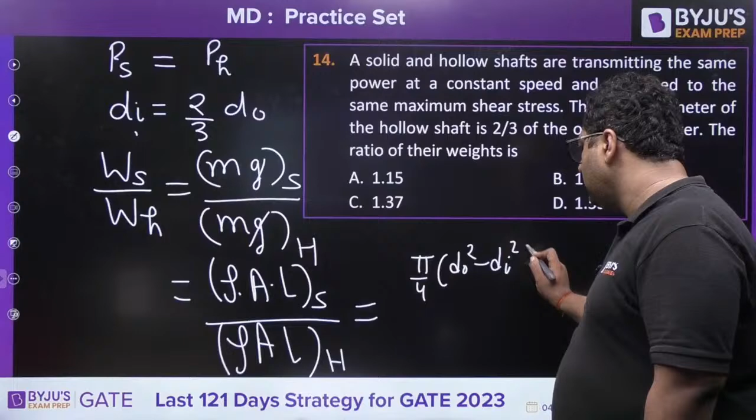Weight is nothing but mg. Mg of solid, mg of hollow. The g will get cancelled out. Rho into area into length of solid, rho into area into length of hollow. Since they are made of the same material, density will get cancelled out. So you will have pi by 4 d naught square minus di square, and pi by 4 ds square.

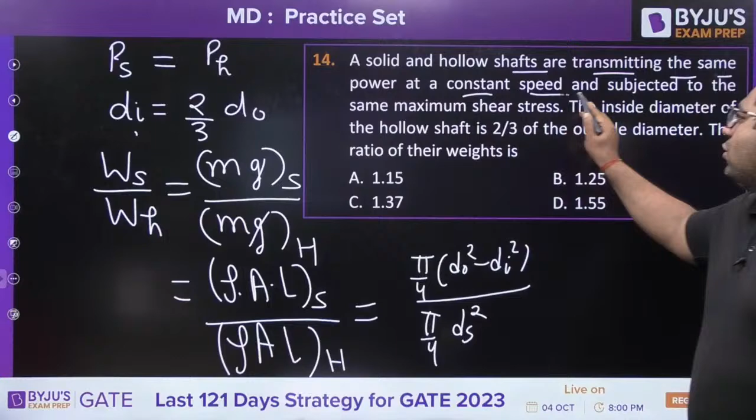So they have mentioned solid and hollow shafts are transmitting the same power, constant speed, subjected to the same maximum shear stress. Using this, you will get a relation between ds and d naught, and get the answer.

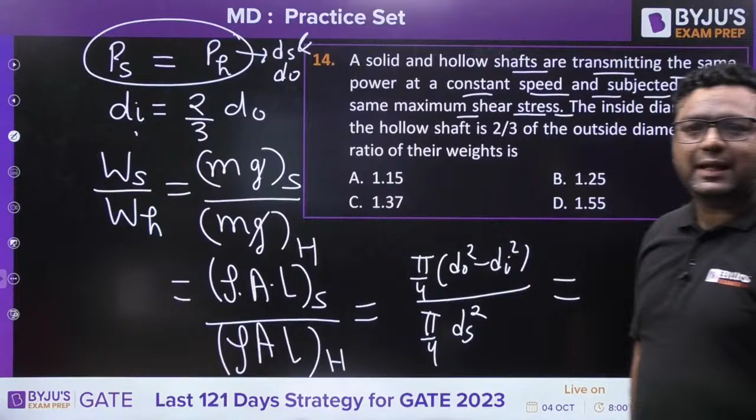Last question. Okay, Mani is saying 1.55. Dilip is saying 1.55. What about others? This is the last question. The last question, very good. Vineet is saying 1.55, wonderful guys. Krishna Murthy is saying D. Vineet is saying the same and the answer is D. D is the right answer.

So what I found is, guys, you are majorly good in concept. Those who have studied machine design need to work on calculations more. So don't worry, guys, the problem will be resolved with time. You still have 3 months in your hand. Day by day, with more and more practice, the issues will be resolved one by one. So don't worry about that, just practice a lot, all the issues will be resolved.

So I feel we shall leave here because we have completed all 14 questions. With this, all my subjects are completed. I have taken strength of materials, theory of machines, and machine design for you guys. Now we are left with only one thing, material science, for this GATE Champion series. So on Saturday we are meeting for the same, guys.